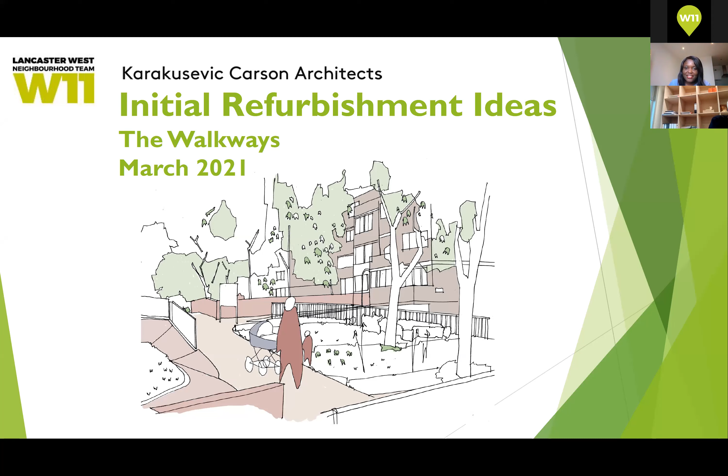Next slide, please. I'm going to start off with a quick introduction to the Lancaster West team working on the external refurbishment of your block - that's the outside of the buildings themselves, the communal spaces, the lower ground floor levels, and the landscaping.

Many of you will have met James Caspel, our neighbourhood director. Also here today is Andrew Sluizer, head of refurbishment design and delivery, Alfie Peacock, refurbishment design and delivery project officer, and Janet Hall, network engagement manager. So you'll probably hear from most of us before the end of the evening. I will now hand over to John Moore, who will introduce the KCA team.

John or Caroline? I was on mute, so I'm not on mute anymore. Thanks, Bunmi. It's been a real pleasure and privilege for myself and our team to get to know the Lanc West team over the past few months. Sadly, we haven't had a chance to get to know many of you residents because of COVID. You may have seen some of our faces down on site in September, October, November, where we've been looking at some of the empty flats and looking around the buildings, but it's not been possible to meet face to face. To save a bit of time, I'm just going to shout out the name of the team, and they're going to say hello so you can see their face light up on the screen.

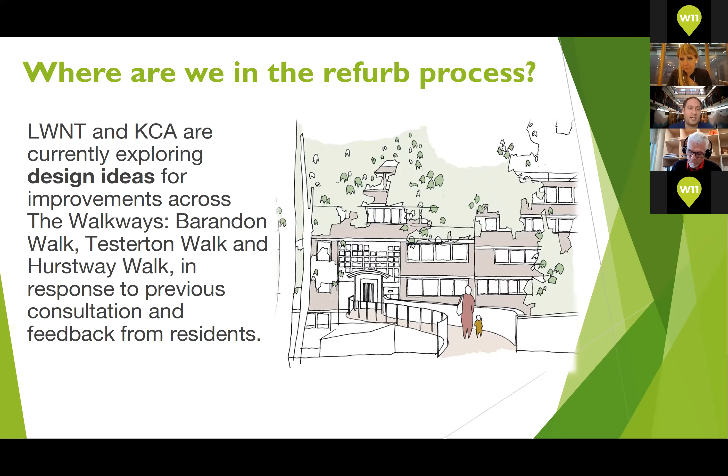So we move on to the next slide, please. So why are we meeting today? It's to develop the approach to the co-design process. We'll give some views about how we want to engage with you, but at the same time, given the government restrictions and so on, we have to be quite creative.

Really keen throughout, if people want to pop ideas and questions in the chat, they want to come on, you can put your hand up and Bunmi will bring you in. Although it's quite a long meeting and we've got quite a lot of information to share with you, we really do want this to be as much of a conversation as possible.

So we'll be sharing our initial design response to your top 10s, which were developed by residents in the last 18 months or so. Just to remind those of you this might be new to, we have an internal refurbishment program as well as the main block refurbishment program, and it's those main block refurbishments which we'll be talking about today—things like windows, heating, hot water and so on.

As we discuss those opportunities, I just want to emphasise we really do want to capture your ideas, concerns, immediate feedback. In the weeks following this meeting, Bunmi's mentioned we're going to share the video as well as the slide deck, and there'll be a summary version of the feasibility report which KCA have produced. For those of you who want that level of detail, it will all be made available to you.

So just a reminder of our vision: we are here to deliver a 21st century model estate for social housing, making the existing buildings more energy efficient, greener and safer. In January 2020, the council made a commitment that all homes on Lancaster West should also be carbon neutral by 2030.

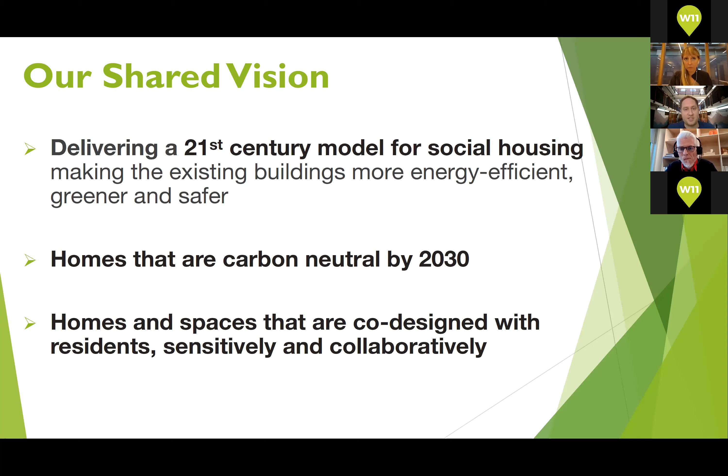So what we're really looking to do is seize this once in a generation opportunity to put a green recovery at the heart of the Grenfell recovery, which obviously the estate refurbishment falls under. We want homes and communal spaces to be co-designed with residents sensitively and collaboratively. For those involved before, we've discussed how that might work, but what we're trying to do is listen and iterate with residents, get your feedback, play that back to you, so we move together towards something the vast majority of residents see as a really good thing.

As I mentioned earlier, we have some additional funding news, and for the walkways that's particularly special because we've secured not just one additional pot of funding, but two. In terms of what that means, we're looking at over £18 million worth of additional new funding. Since we last met as a block, probably last summer, we've secured a significant amount of funding.

That's to do two things. First and foremost is to ensure the walkways are as safe as they can be from a fire safety point of view. A lot of works have been undertaken, and we're working with the London Fire Brigade to ensure that through the refurbishment process, we make your homes even safer. We've secured additional funding for things like sprinklers. We're going to hear later on about fireproof glazing that could potentially replace the fire curtains, which were brought in as an emergency measure and we've had nothing but complaints about. Equally, what you've told us is you don't like the look and feel that they give the walkways.

Secondly, alluding to the policy commitment to be carbon neutral by 2030, we've secured additional funding, in this case from central government. I can't say too much now, other than that it will enable us to really reach the gold standard of the refurbishment—things like triple glazing are now on the table, whereas when we last met that was, to be honest, an aspiration. It doesn't mean we can afford everything, so we can't necessarily afford to put 24 new lifts throughout the walkways, but it does mean we can ensure the investment we put into the walkways really does address a really positive refurbishment experience, and ultimately the outcome becomes walkways you're all proud to live at.

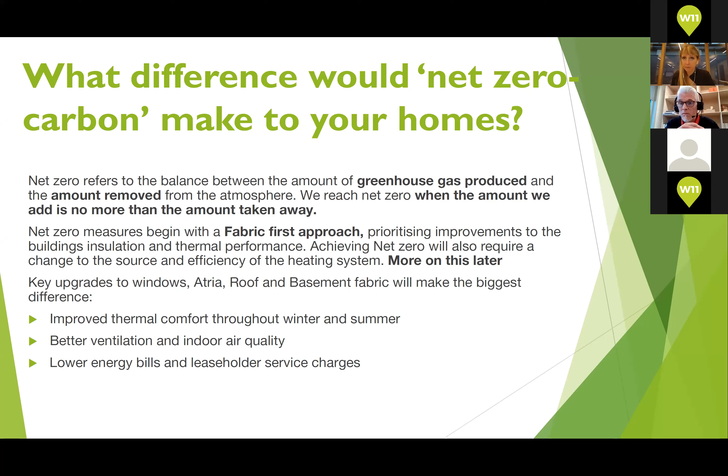The benefits for you will be improved thermal comfort, so it should be easier to keep it warm and cool, summer and winter. It should give you better air quality as well, and maybe more importantly for you, much lower energy bills. If you go to the next slide, please.

We've not only listened to the top 10 comments you've been making over the last few years, but also looked at ongoing resident feedback about things that don't work. It's clear that plumbing, leakages, electrical problems, and also problems with the door entry system are big issues. It clearly shows those systems are really getting to the end of their life and need to be replaced or significantly repaired. So we've kept that in mind, and the idea is that the new services or replacements will hopefully last for the next decades, 25, 30 or more years to come.

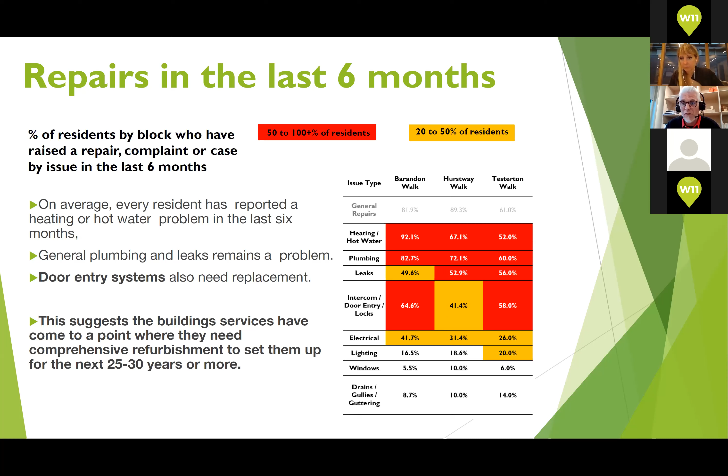Next slide, please. I don't know if any of you, I think some of the leaseholders are probably aware of this.

If you're buying or selling a property, the government requires an EPC, a performance certificate. Pretty much all buildings can have this certificate, which tells you whether it's really inefficient or really efficient in terms of energy. Most of the homes at Lanc West are category D, so not the worst, but not very good. Some are C, and our aspiration and target is to make these B or better.

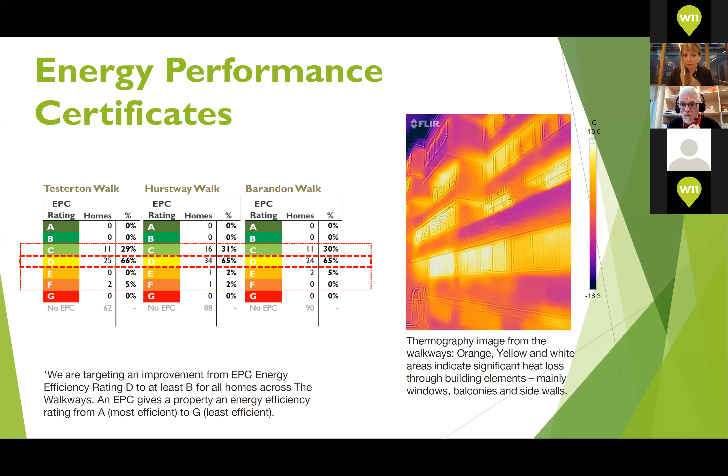We really want to make an improvement to the energy performance, the comfort and efficiency of your homes, and there are some clear areas where we can do that.

There are a lot of fire safety measures taking place, like replacement of front doors and introduction of sprinklers in the future. Those works can be quite intrusive and will require entry into your homes. If we can tie in the works that improve thermal performance with the works for fire safety, like sprinklers, then hopefully we can keep the construction time down to a minimum.

Bringing all this work together, we hope to improve the energy efficiency, improve the quality of the common spaces in the atria, and at the same time improve the fire safety. So if we go into the next slide, please.

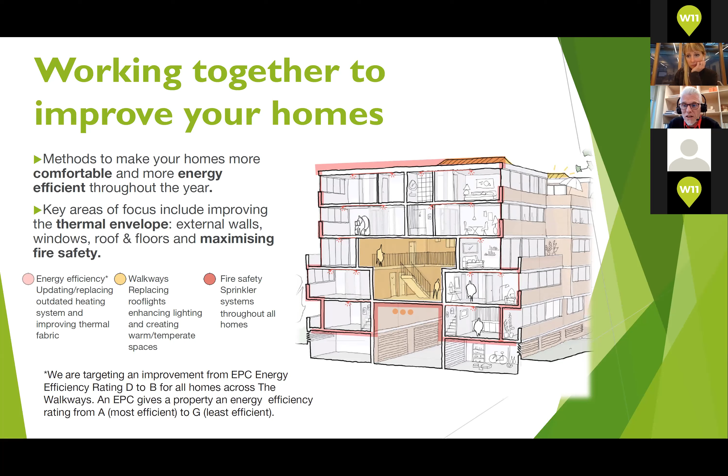Areas to be addressed are windows, heating and hot water, communal electric spaces, and how the communal areas look and feel, including door entry systems, refuse storage, and communal entrances. Within the homes, things like bathrooms and kitchens are an area where, in many cases, they've been there for 40 years, and it's been agreed that they can and should be replaced with your agreement. So that's something we can bring all of that work together.

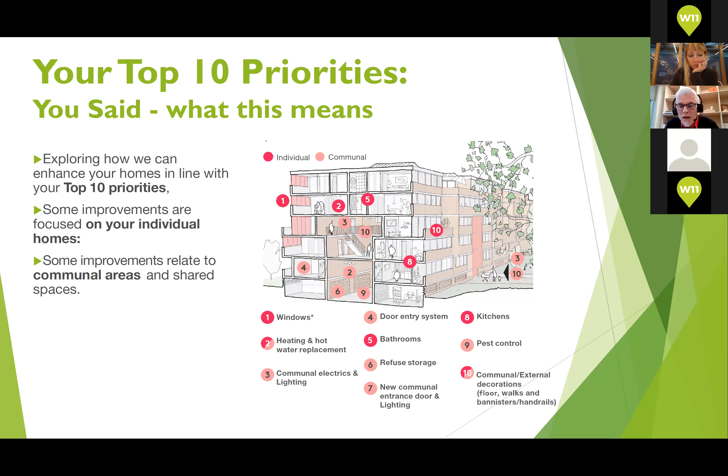If we go to the next slide, please. And the co-design process - well, if it hadn't been for COVID, we'd probably be meeting face to face many months ago. As I said earlier, that wasn't possible.

So we are starting now, really. I think we had a meeting with some block representatives slightly earlier in the year, but effectively in the next few months we should be talking like tonight with you more often about your individual homes and the things we can do in the common areas.

Tonight is more of a sort of information session - what we found out, what the proposals might be. As we go through the process, we'll be expecting feedback from you, which will help us make decisions about the right things to do. Hopefully, as we go on, there'll be detailed design areas where you can get very involved, like color of materials and choice of various other elements.

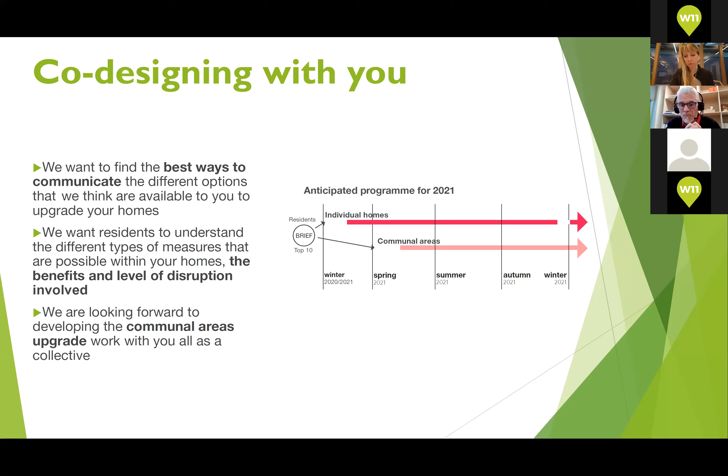Okay, so I'm going to hand over to one of our trusted team members, who has remotely been getting to know your buildings very well and is going to try and explain to you what we think they are.

You can see the three blocks: Hurstway, Testerton and Barandon. They're a really unique set of buildings - we think they're really beautiful. What's special about them is this long central communal area that runs through them, as you are all aware, and from which they get their name.

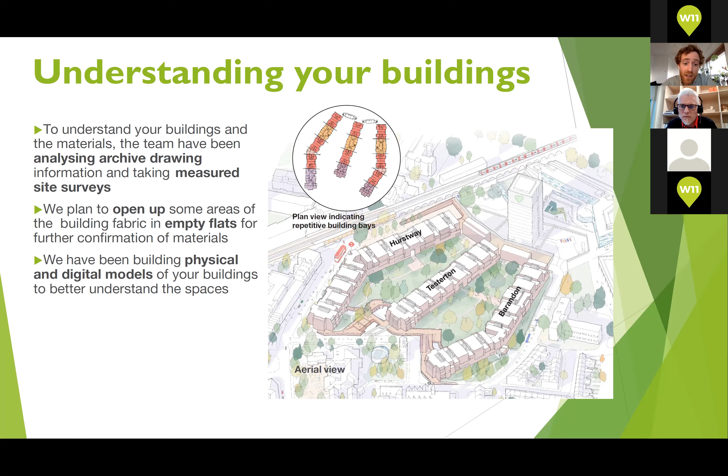You can see the lower levels of 3-bed homes. These are duplex homes or 2-story flats. There's a layer of flats above that, which is single story, and then on the top floor there's a mixture of flats and duplexes. These create the little light wells where the roof lights are that bring light down to that communal space below.

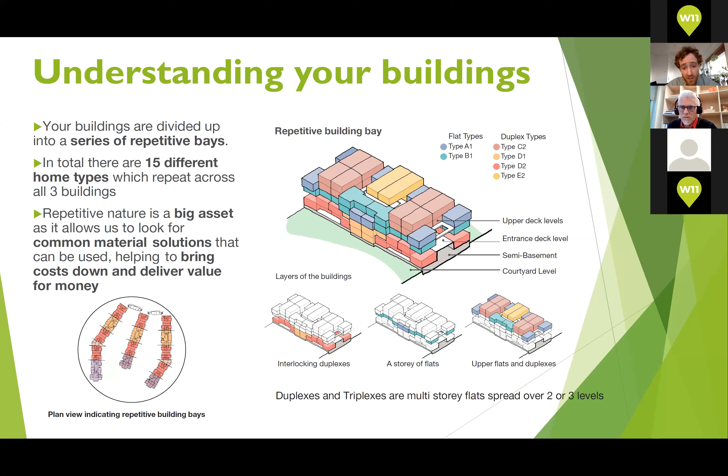So what does this all mean? It means we can use the highly repetitive design of the existing building to find a common solution. This brings down the cost of the upgrade work we're doing, and delivers value to you, the residents, and to Lancaster West.

Next slide please. These sketches show another aspect of the building we've looked at - your journey home from the street to your front door, and how this can be improved as part of the works. These sketches illustrate that experience of the journey, and what you're familiar with.

Common obstacles like the ramps at the courtyards, or the staircases inside that bring you to the upper stories, and the walkways which are quite narrow, and the steps at the threshold of each entrance. We want to discuss these because we think it's key to get the communal area upgrade right. Things like accessibility, making it easier for people with physical impairments to enter the building and get home, is a good thing. Also improving wayfinding, making it easier for you to get deliveries or for a friend to visit, including work like improving the signage.

Other things we're looking at and want to discuss are improving the acoustics, improving the doors and windows - the space is going to help with that. Another item would be looking at the lighting, so it's a much more pleasant and welcoming space on your way home. Next slide please.

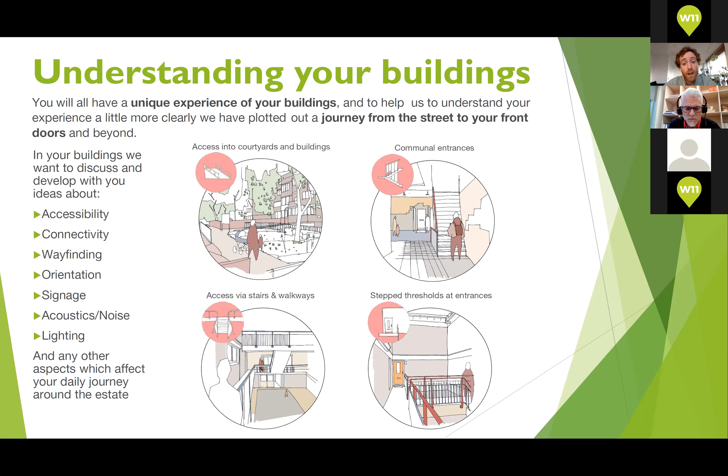Moving on to the upgrade works that John outlined and the principles of fire safety - this is a key part of the works. There's a number of measures currently being developed, with an expert team working on this with Lancaster West, which we are part of. Outlined here are some of the packages of this work.

The second is installing sprinklers in everyone's homes. Another is installing smoke detectors in everyone's homes and in the common areas as well. Another element is installing new windows - fireproof glazing for kitchens and bathrooms that open onto the common areas - and also replacing the entrance doors, which is already happening.

Lastly, to improve the thermal performance of the buildings, to keep heat in and reduce heat loss, we will be upgrading the fabric, and part of that will be using insulation. This insulation will be A1 or A2 rated, which is the highest classification for building materials.

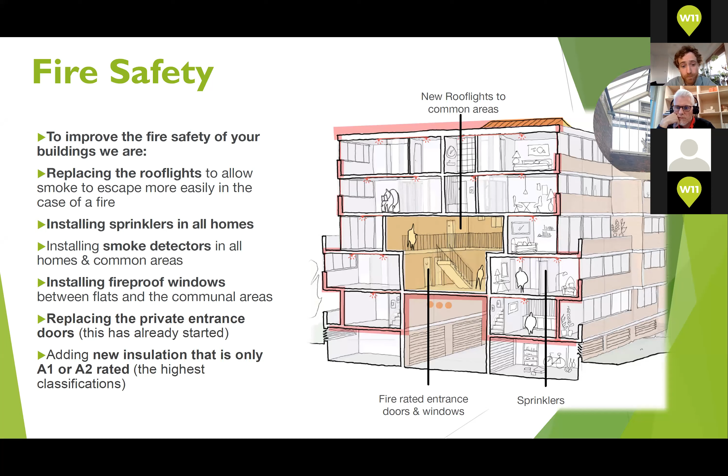On the next slide, you can see what these essential works mean for your individual home. On the diagram on the right you can see a typical 1-bedroom flat as an example. We'll have to install sprinklers in everyone's home, with each sprinkler head in each of the rooms. A new ceiling will go in to hide that new run of sprinklers, and this will require a couple of days' work by builders.

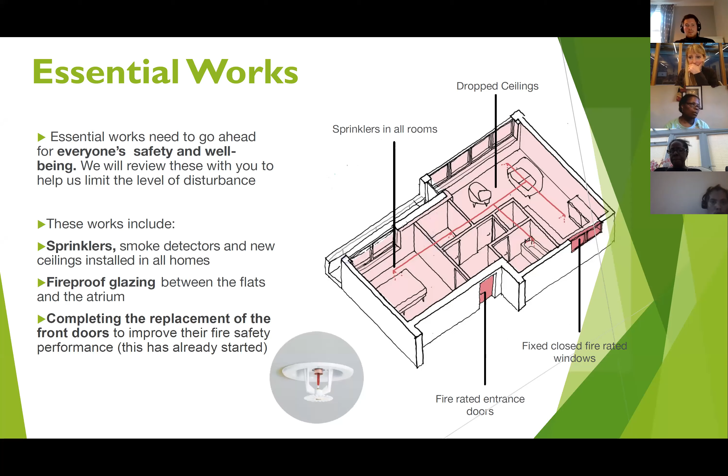Any windows that open onto the common areas, highlighted there in darker pink, will need to be replaced with fireproof glazing, and will also be fixed closed. Previously there was ventilation through that space, but that won't be allowed in the future. Similarly, the doors need to be replaced, which is again currently happening. Can you see the next slide, please?

Oh yeah, there it is. Oh, is that not coming up? Yeah, no, it came up. Sorry, it froze for me.

We're going to use this opportunity to install these ceilings and also install a new ventilation system. Up to 72% of homes have a window into the common areas, and as that window is going to be closed, we think it's an opportunity to bring a new ventilation system in that will help reduce condensation and mold coming from bathrooms and kitchens. This is called an MVHR system, which means mechanical ventilation with heat recovery.

What that simply does is bring fresh air in from the outside. It exhausts stale air to the outside, but recovers the heat from it, which means you pay less in fuel bills overall. The added benefit is it reduces condensation. All you'll notice is in the ceilings you'll have little vents, which you can see on the image at the bottom. Next slide please.

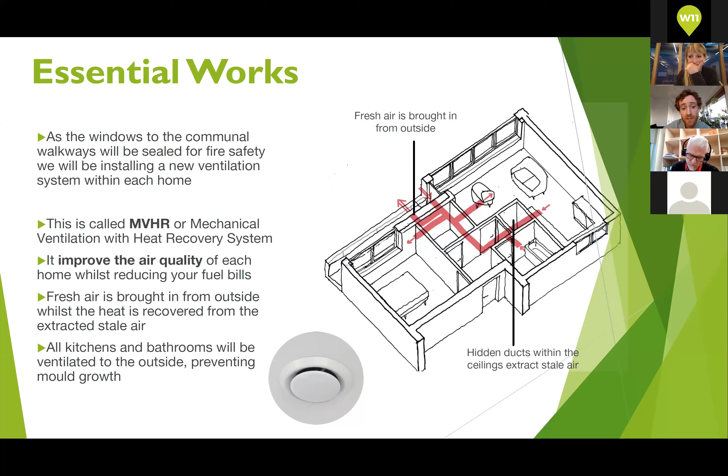Another part of these essential works is that... loaded? Oh, there we go.

Again, we've mentioned already new windows on the external faces of the buildings. They're going to be triple glazed windows and new balcony doors as part of that. There's going to be new low energy lighting in the ceilings in all homes. There's going to be new door entry systems, and upgrading of the electrics as well to make them up to standard. Lastly, there's going to be the removal of the gas supply as part of the fire safety improvements, and these will be replaced with new high power electric hobs.

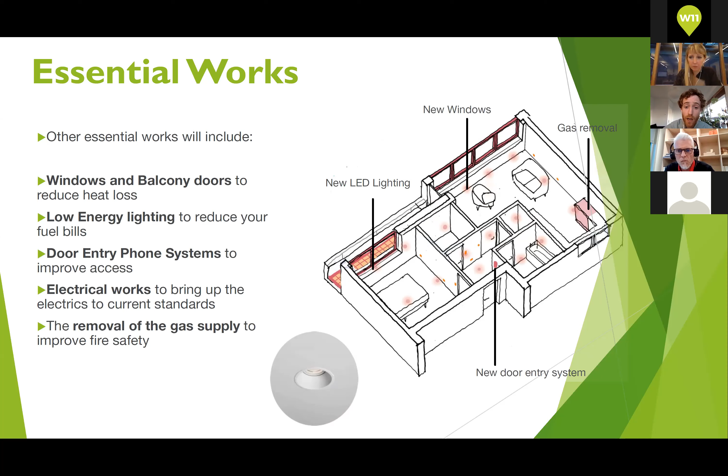On the next slide, going to talk about now the common areas and how we're going to treat them. These are the spaces that run through the center of the block. You can see it in the middle of the diagram on the right, and you can see the roof lights that bring light to those spaces below.

We are looking at ways that we can wrap the building in insulation, marked out in yellow, and in red you can see where we're going to heat the building. The homes are obviously going to be heated, and in this option on the right, we've looked at whether we could heat the central atrium space as well. This would be using low energy technology, like solar panels. The advantage is that we wouldn't have to insulate those communal area walls, any walls that face between the flats and that common area.

What it means is that the temperature in both spaces, the common area and the homes, would be roughly the same. From our analysis, this is suggested as the best way to treat this space because it reduces heat loss from your homes and minimizes disruption since we're not having to insulate those walls facing that space. However, we've looked at other options, and on the second option, on the next slide, you can see it's very similar.

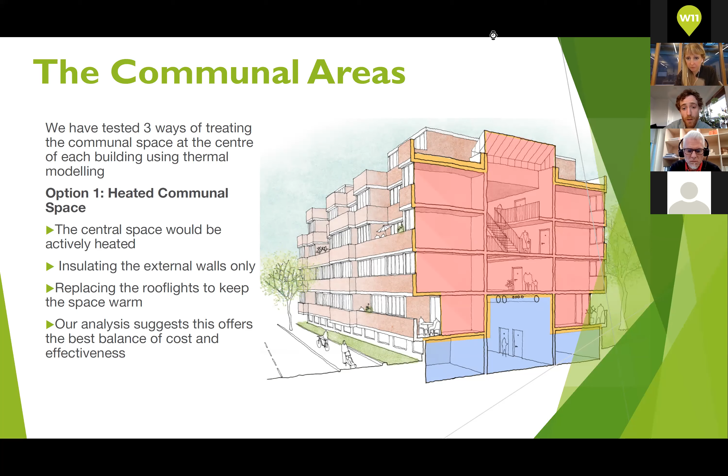It's got a new roof light like the first option. If you go back one slide please. And yeah, that's the one there.

It's quite similar to the first one. We're insulating on the external walls, insulating the basement as well. We're introducing some insulation in the common area walls, probably cavity fill insulation, which is a little less disruptive than a full lining. Similar to the first option, we're introducing a new roof light.

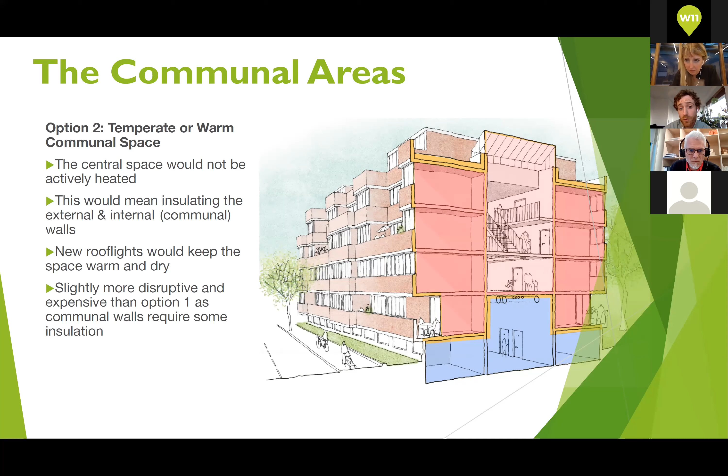The third option we've looked at is whether we would return to keeping the building like its original state as a cold space. That image coming up now. There we go, so the blue indicates the cold areas.

This requires a lot more insulation. We'd have to wrap those walls, and it means we have to extend the walkways, the access walkways, as a result. So there'll be a lot more disturbance involved in this piece of work. At the moment, option one is looking like the best option. Over to Caroline now.

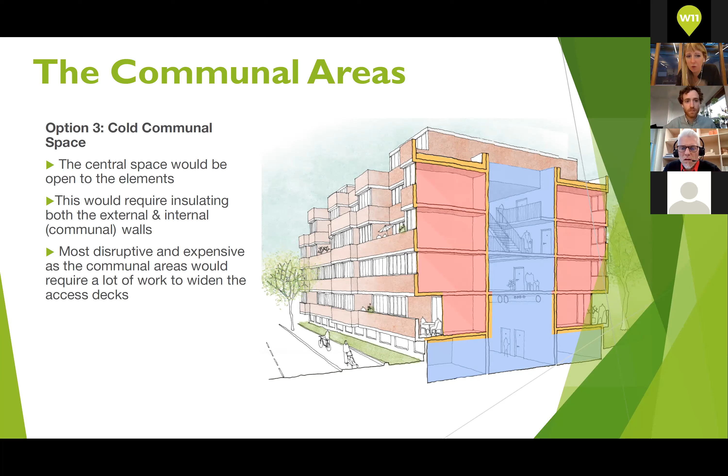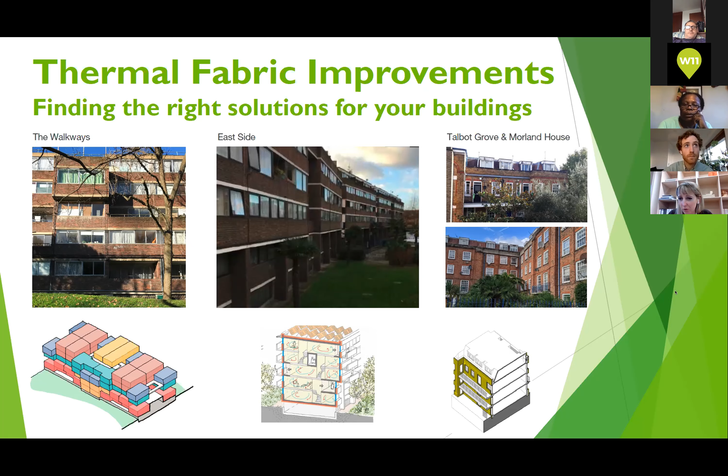So we were talking about finding the right solutions for your buildings, and about working quite closely with the other estate architects, but it's very important that we hone in on what is specific about your building. Your buildings have got very dynamic facades. The Walkways buildings have many projecting and recessed elements, resulting in a number of complex junctions for anything externally mounted to the facade. That's a key consideration for us, and this is not the situation with a number of the other buildings across the estate. So we're going to see different solutions coming forward for different buildings, no doubt, and it's important to acknowledge this from the outset.

So there are a variety of different elements in your buildings - the roofs, windows, walls, floors - which could be upgraded to improve their thermal performance. We've been collating a number of different options for how we might improve these particular packages, and it's really important that we develop all of these options with you into the future, acknowledging the careful balance between long-term benefits and short-term upheaval. We want to give you full clarity on each option to enable you to make a clear choice.

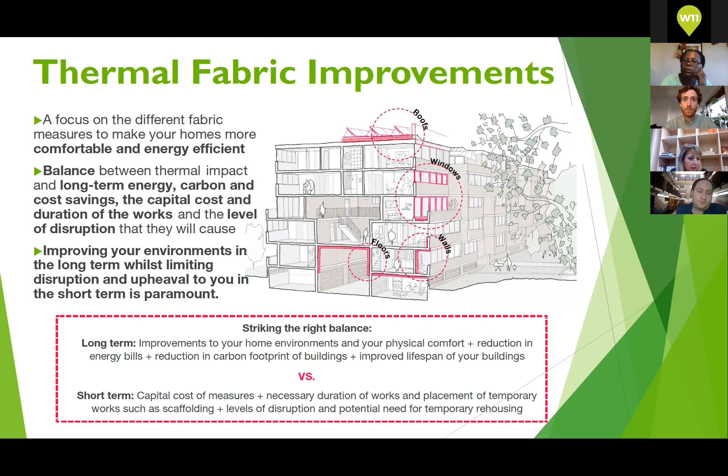So just to hone in on the specific packages themselves: roofs - insulating the roofs will reduce heat loss and heat gain, and there are other opportunities available when we look at the roofs. We'd like to look at ways of improving biodiversity and introducing green energy such as PV panels, which will help reduce your energy bills. With windows, they account for probably the largest thermal improvement, fabric improvement, in your buildings, because they account for such a large amount of the surface area.

So changing these to airtight triple glazed frames will have a huge impact. Similarly, upgrading balconies with new waterproofing, insulation and rainwater goods will help deal with a lot of the leakage problems that John mentioned earlier, which we're acutely aware you suffer with at this stage. Also with the floors - this is showing the underside of the slabs in the garage spaces and also the adjacent walls. Insulating the underside of those exposed slabs and walls to reduce heat transfer to the unheated garages below will be really important.

It's worth noting that all of the new insulation options currently being explored are A1, A2 rated, which is the lowest risk material rating under the fire regulations. We want to explain all of the different systems we're looking at with full clarity to you at every stage through this process, so you can feel comfortable that what we're proposing is the most safe solution. We're working with Mark Allen, who introduced himself at the beginning of this meeting.

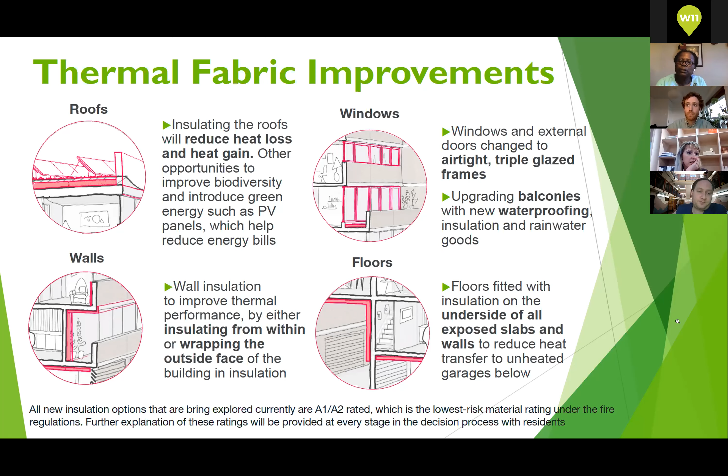Finally, Caroline, can you hear me now? Can you hear me clearly now? Good, I'm back on the call, so if you need me, just shout. Okay, carry on, thank you.

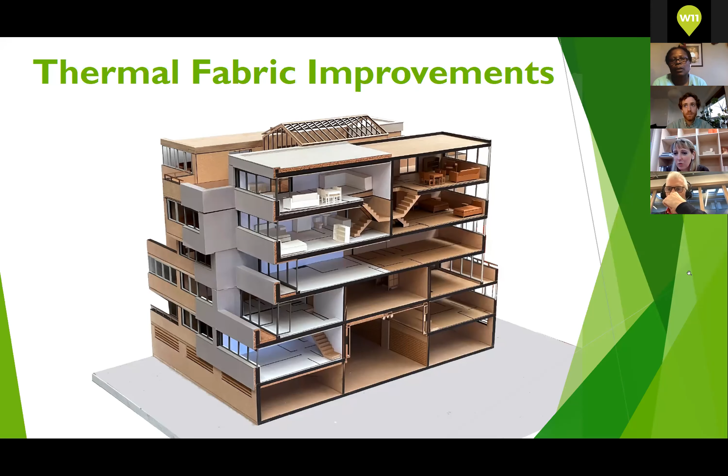It's also helpful to communicate how certain thermal improvements in your properties will help your neighbours and vice versa, and how they will improve acoustics. So it's a bit more of a bigger picture - there are knock-on effects for your direct neighbours.

So we just wanted to give a very brief introduction to the way in which we assess how well your building performs thermally, and with every proposed thermal enhancement that we're looking at.

John showed the thermography photo earlier in the presentation. Just to revisit that, that shows how heat escapes from your buildings at the moment. The white areas are where we're getting a lot of heat loss, and the darker areas are where it's actually better insulated, performing better.

All materials have a thermal value that contributes to the overall U value of a building element. Very broadly speaking, the better insulated a structure is, the lower the U value. So low good, high bad, meaning it will be better at keeping the building warmer in winter and cooler in summer. Looking at that thermography image, high U value, up at the white and the yellows, shows a lot of heat escaping. A low U value is where we have very little heat escaping, so it's performing much better.

Your current buildings' wall build-up has a brick outer face with a cavity and a blockwork inner face, which has a mortar coat on the inside. The U value this is achieving at the moment is 0.82, which is okay, not great, and there are things we can do to really help improve that. So what we're wanting to do is bring this down to around about 0.3 U value to meet with energy reduction targets that have been set.

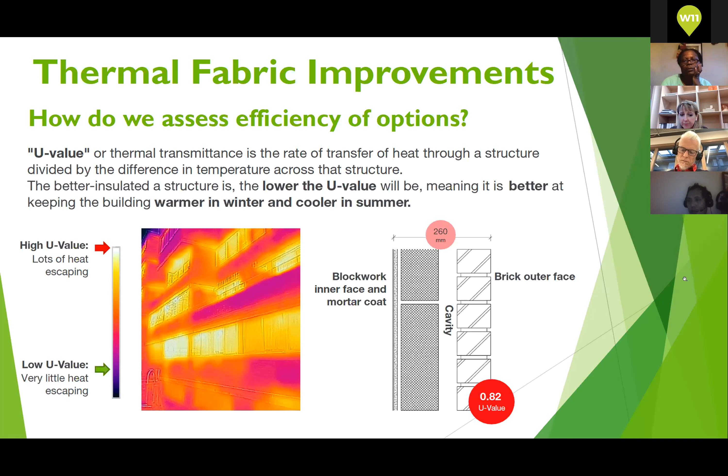So we've used an example of clothing to try and communicate to you the broad ideas about how we might go about insulating your buildings. Imagine that different ways of insulating your walls are similar to the different layers of clothing that we all wear. Suppose your buildings behave like a jumper, which is working relatively well at the moment, but you'd rather be a lot warmer. So one option would be to wear a thermal vest underneath your jumper, and another option would be to wear a coat over your jumper.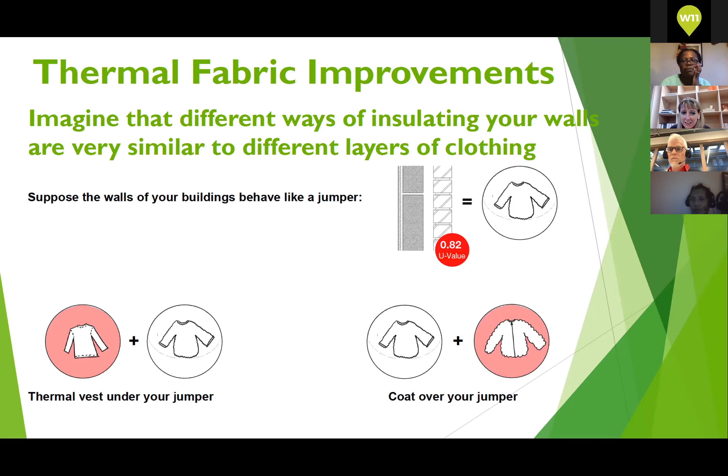So if we go down to the next slide - as you can see, for our buildings, we can put the thermal vest on the inside, or we can put the coat on the outside. Different insulations will behave in different ways at different locations within the building.

If we go to the next slide, it's worth mentioning that both of these measures are working really well. They are improving the overall performance of your buildings. However, at the moment, the internal wall insulation option is maybe just performing that little bit better. There are other considerations that we have to take into account here.

It's worth mentioning that it's maybe a little bit guided on the internal wall insulation side, because the actual insulation we've looked at there is really high performing insulation. Because of its location within the building, it's really adequately reflecting heat back into the space. The external wall insulation we're showing here is maybe not performing quite so well on paper, because it's supported on a system of rails, and as we all know, metal conducts heat really well.

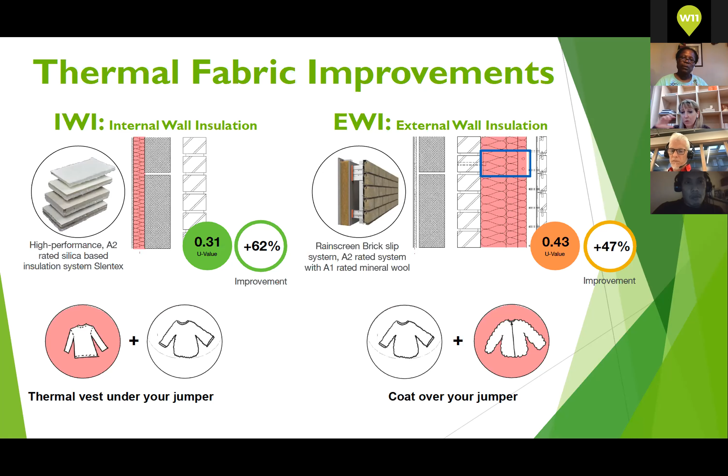So this is what's known as cold bridging. If you put a sort of metal grid on the outside of the building, these are the locations that heat can start to escape from your building and cold can start to come in. So we can look at other systems for those rails. At the moment, I think the metal system is predominantly the best, because it's meeting with all the fire safety regulations. We just need to make sure that everything we do is fully compliant with the A1, A2 ratings.

It's really important to note that these are just two options that we've been looking at. There's a myriad of different options out there, and we've been interrogating a number of different solutions. This is just a starting point in the conversation. We are not sitting here tonight saying we want to go with this one, we want to push this one ahead with you, but it is probably the two front runners, and it's also the two which have got quite a lot of difference in terms of their application and what it will mean for you in terms of installing them within your buildings.

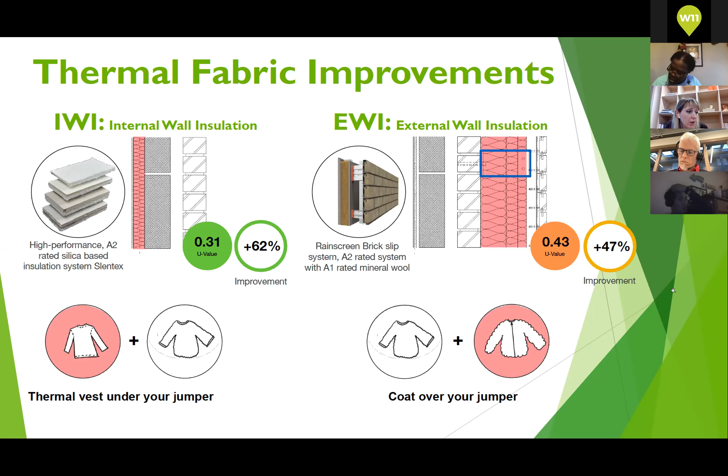So the other areas for consideration, it's not just about what it means for the long term, but going back to that short term analysis - what does it mean in terms of access into your units? For internal wall insulation, we have to gain access into your units to install it, although it is a relatively quick installation process. As we've mentioned previously, the essential works packages will need access to your units, so there is potential for installing some of these measures as part of that.

There is also a very small impact on the internal areas. It's only 3 centimetres that we're looking at extending that internal wall out to accommodate this insulation, so it is really highly performing.

The other thing to mention about external wall insulation is that we don't have to gain access into your units - there's a huge benefit to that. But at the same time, it is quite a lengthy installation process, and it does, we believe, require scaffold. It also has some implications for your balcony spaces - if we build out outside of the wall, we're building into those spaces, so there would be some loss of area on your balconies. We're trying to pitch out all the implications for these different materials at the moment, but we need to develop these in conversation with yourselves.

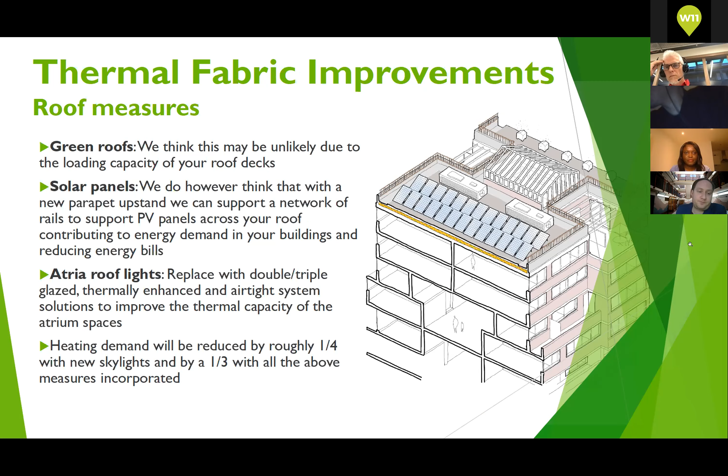I think what Caroline was explaining there - imagine if you're in your home looking at the window, very often there's a radiator on that wall, sometimes a kitchen. If there's a radiator there, we would be adding about 1 inch or 3 centimetres of material onto the wall in depth to improve its insulation. So if a radiator was hanging there, it would be taken off, we'd put insulation and plasterboard on, and then the radiator would be replaced.

In some cases there's a kitchen on the outside wall, and in those cases we may not bother doing that at all. It may not be necessary because the kitchen itself is already providing a little bit more insulation than a standard wall. So obviously, the more insulation we put on the better it performs.

But the calculations that us and our team, XCO2, have done have worked out that the biggest improvement will come from windows. The second biggest improvement will come from warming up the atria areas. The third biggest improvement overall will come from insulating underneath the building where the car park and garage is. The next area of improvement is the roof, and so on. So what's left is the small amounts of wall that remain - they will make a difference, but not quite as much as the others.

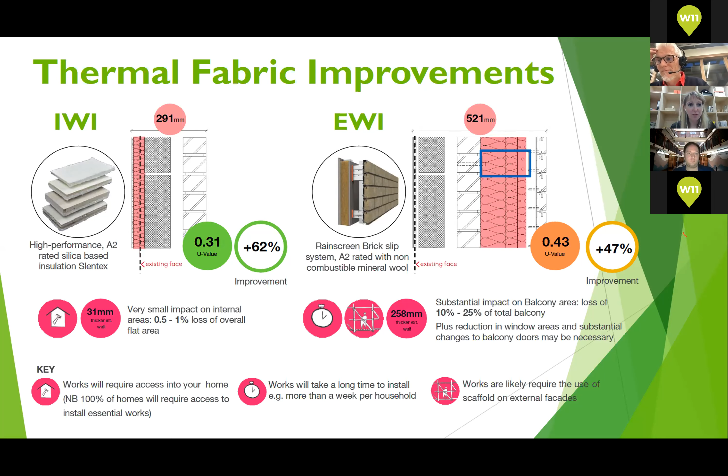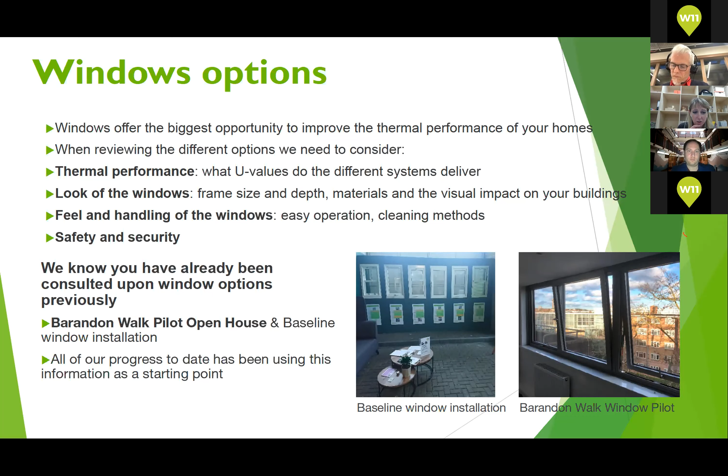Just to recap on the Windows pilot 2019, we weren't actually involved in this, but we've got a lot of feedback information from James and Bunmi and the team. We've plotted that out within the particular options we're looking at, taking good note of the color preferences you expressed, and the key areas: ease of cleaning, safety and security, and the thermal capacity of those.

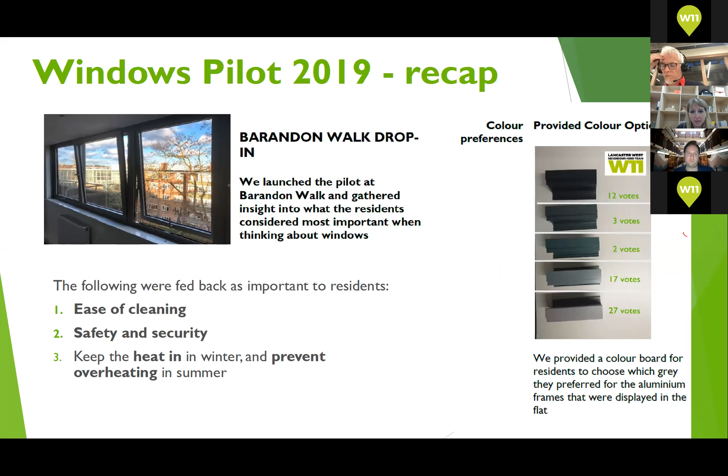The one thing to be said is that it can be quite cumbersome to operate, so we need to be cautious. The premise is that we're wanting to get a series of samples made up, actual size of your windows, maybe installed at the baseline entrance, so you can all come down and have a play around with each of the different systems.

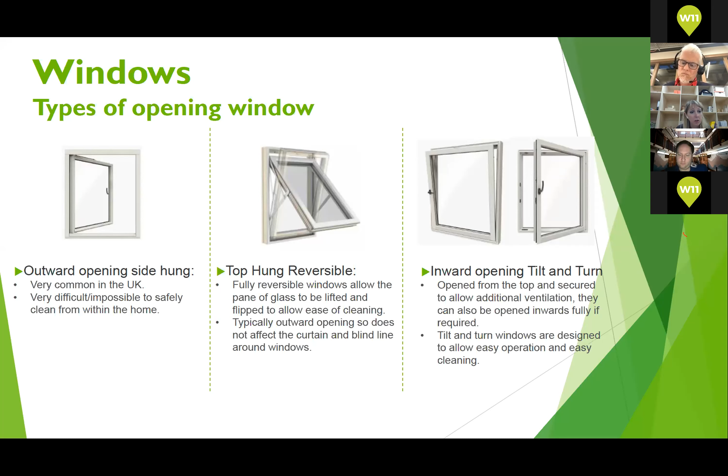You've obviously already done that within Barandon, but it's important we revisit conversations about the different window manufacturers. The inward opening tilt and turn, which you've got on Barandon, opens from the top and secured to allow additional ventilation - that's the image on the left. They could also be opened inwards fully if required, which enables easy cleaning. It does have the knock-on effect of interrupting your curtain or blind line, so that's another thing to consider.

Next slide, please. So these are the three different manufacturers we're looking at. Sorry, quick interrupt just on the previous slide.

Helena would like to know why sliding windows are not an option. I think we've had to discount it - we are not finding nearly the right types of thermal efficiency for sliding windows. We should plot that out as an alternative for future discussions, just so you've got it as a comparative exercise. We've been in touch with window manufacturers. One thing to mention is that the way your balcony doors work, we think we can only accommodate a slider there, because putting a side hung casement window in would have too much of a negative impact on your balcony spaces. So at the moment we're focusing on sliding doors for your balconies, but opening casements for your ribbon windows that sit at a higher level. Does that answer the question? Yes, it does, thanks Caroline.

Perfect. So these are the three manufacturers we're looking at: Reynaers, Velfac, and Ideal Combi, which is in Barandon. The Reynaers - it's coming down to a bit of a two-horse race at the moment, because the Reynaers is quite expensive.

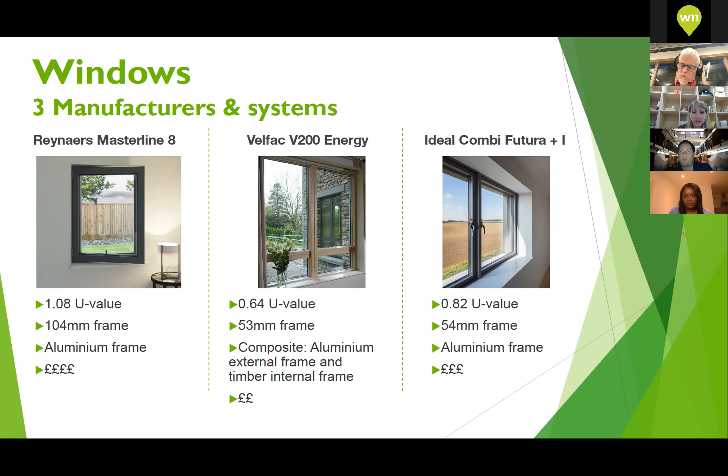And then the final one, the Ideal Combi - not quite as well performing as the Velfac thermally. It's got a similar frame profile, again full aluminium frame, and it's slightly dearer than the Velfac is coming in at the moment. Next slide, please.

Caroline, yes, new question from Michelle. Will the new windows cut the glare from the sun?

We are looking at dealing with the solar glare. Is it to do with heat gain, or is it to do with glare? Michelle, do you want to expand on your question?

Michelle: Hi, I live in Testerton, and my windows face Barandon, so I get the sun all day. It's very hot during the day in the summer, and the glare is quite strong.

We can look at dealing with this through glass specification, but I think, John, our recent discussions, especially about solar gain - which is when the sun comes through your windows and heats up the space from within - we are looking at whether there might need to be some solar shading adopted on the buildings.

Yeah, that's right. So Michelle, I think your flat and many others do get a lot of overheating, and it's because the windows are very generous in size and full width. So when the sun's shining on them, you are really going to overheat.

The new triple glazing, and the fact that we have to introduce a small ceiling void to hide the sprinkler pipes, will mean the windows get a little smaller in height, and being triple glazing, they reflect back some of the light so less daylight comes through. I think you'll still have very bright interiors from a daylight point of view, but as Caroline was saying, there's the possibility of introducing external shading devices.

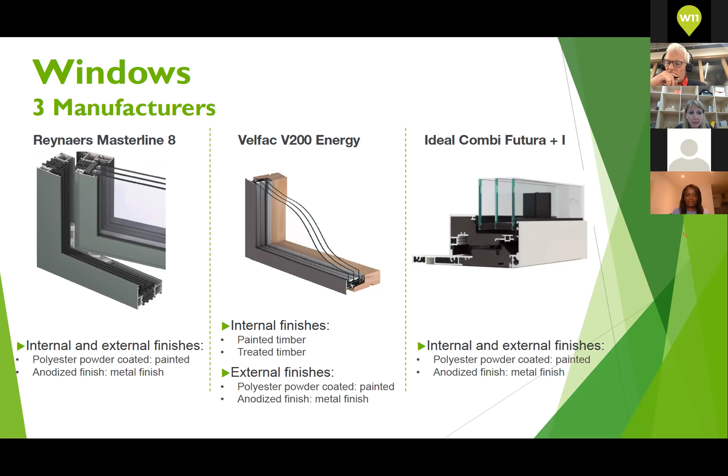So I think we've probably already heard quite a bit about the pilot, but this is an empty flat located on the lower levels at Testerton. It's number 411, a 3-bed duplex spread over 2 floors, and it has been identified as a possible location to trial a number of the systems and materials we have been looking at. The approach will be similar to the open house fit out of 317 Barandon, but will be a lot more comprehensive, with a focus on the thermal fabric improvements.

We want to run a series of informative videos where we can explain a bit more about the different systems we're looking at installing there. We want to run time-lapse videos. We think this would be really helpful, because you set a camera up in the corner of the room, you replace all the windows, and you clearly document how long it takes, how noisy it is, what's involved, how much noise, how much dust — all of that kind of stuff is incorporated within those time-lapse videos.

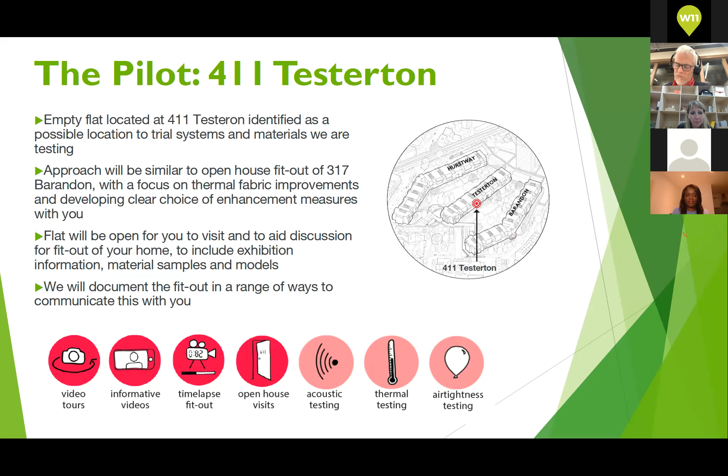So minimizing disruption, we have to have probably some quite tricky conversations in the future, no doubt. The team, us as a team, we want to limit disturbance to you whilst delivering these essential and optional works to improve the walkways. But health and safety is critical to assessment of these options whilst you are remaining in situ.

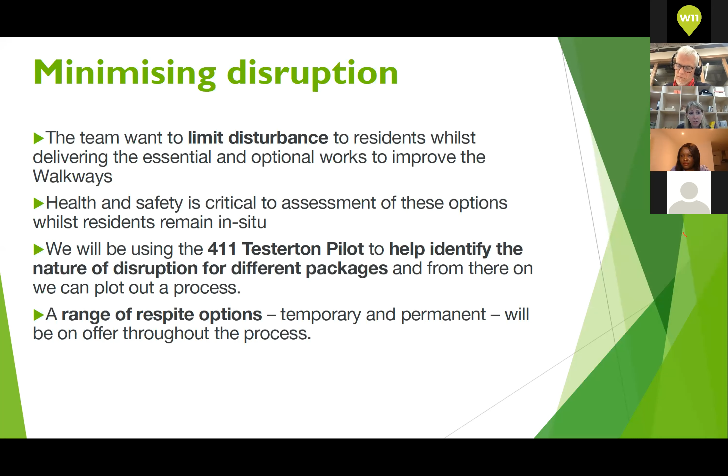So the 411 Testerton, we think the pilot will really help to identify the nature of disruption for all of the different packages that we're looking at. And from there on, we can start to plot out a process with you. I think it also enables that degree of choice.

You will be able to say, no, I just want the essential works, or in actual fact, you know what, if you want a new kitchen or the new internal wall insulation or whatever it is, you can more clearly understand what's involved in that process and how long it's going to take.

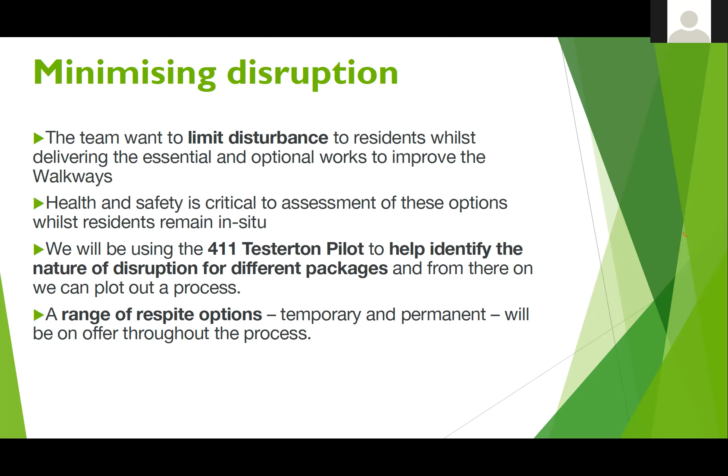So a range of respite options, temporary and permanent, will be on offer throughout the process. And that's something that I think the Lancaster team will be keeping you up to date as we progress these discussions. Next slide.

So there's the air permeability testing. That's all about understanding where the air is leaking from your unit, because that has a big impact on the thermal capacity of your buildings.

Temperature sensors located in the walkways. So we've been able to understand a bit more about how those function throughout the day. And that's going to be quite crucial in how we start to fit those particular spaces out, how we seek to improve them.

In situ U values. So going back to the U value conversations, these help to confirm our technical assessment of the thermal fabric. They are in effect real-time U values, so it's really helpful for us.

The thermographic testing on the external facades, and that's the infrared. That's the nice kind of pretty rainbow pictures that we have, which show where the heat is escaping from your buildings, and that helps us to identify the thermal weak spots in the building envelope.

Smart heat transfer coefficient tests. These are tests to evaluate how much energy it takes to heat your homes. So it's really helpful for us to be able to document that.

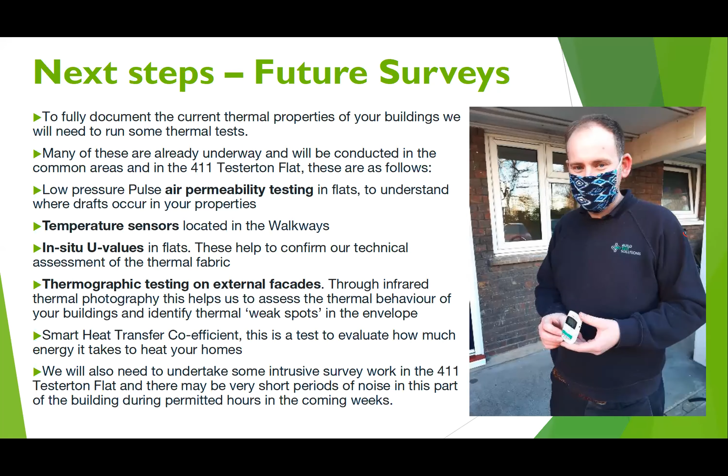I think it's probably not going to be until the end of March, beginning of April, that we start to look at opening up some of those areas.

So this is the call for volunteers. Build Test Solutions are monitoring the thermal and energy data across the whole estate, and they need to install small temperature and humidity sensors in occupied flats, so we get a clearer understanding of how your buildings are working. They're already installing these in Treadgold House, and there's a video on Instagram explaining the process. The installation should take between 5 to 10 minutes, and the sensors will need to be in your flat for approximately 3 weeks. This is one in question on the right-hand side. They're not big bits of kit - I think you'll barely even notice they're there. But it would be really super helpful to us to understand more about how your building's behaving.

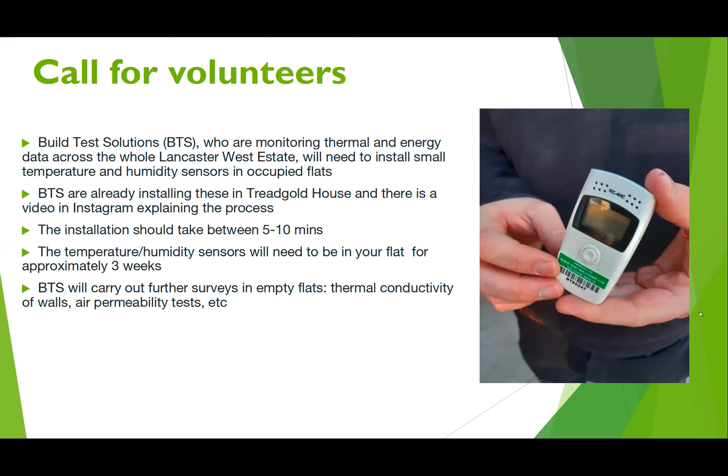Hi, thanks, Caroline. So my name's Janet. I am part of a small team that has been brought into the estate to look at the future heating and hot water solution. So we're looking at this at an estate-wide level, but to come up with a solution that is specific to each block and can hopefully make a positive impact in each flat as well.

Next slide. So just to give you a bit of the background about how the estate is currently heated. In the walkways, I'm sure you're aware that you're currently receiving heat and hot water from the temporary boiler located just outside Baseline. And there's a similar boiler located up in Camelford Court, which serves all the buildings in the green-yellow outline there. So this system currently heats 80% of homes, and there's basically large-scale plumbing.

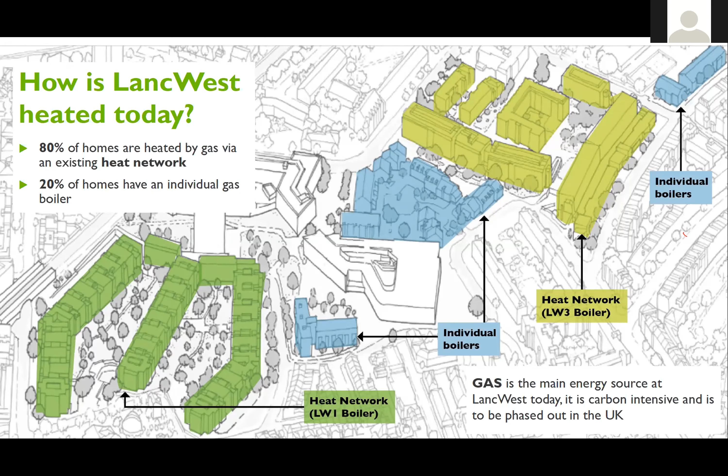Next slide. So at present, there's a large-scale kind of plumbing that connects each of those boilers to the heating, to the radiators in each of your homes. And that is currently powered by gas. What we're doing and looking at for the whole estate is how we could make that more efficient and perhaps bring those two heating networks together to form one large-scale heating network that will be built to purpose, that will be modern and hopefully give you heating controls that you don't currently have in place.

And the other important aspect of the project is to look to move away from gas, because there is a nationwide policy that we should be doing so. So we need to look at the renewable alternative for the estate. Next slide, please.

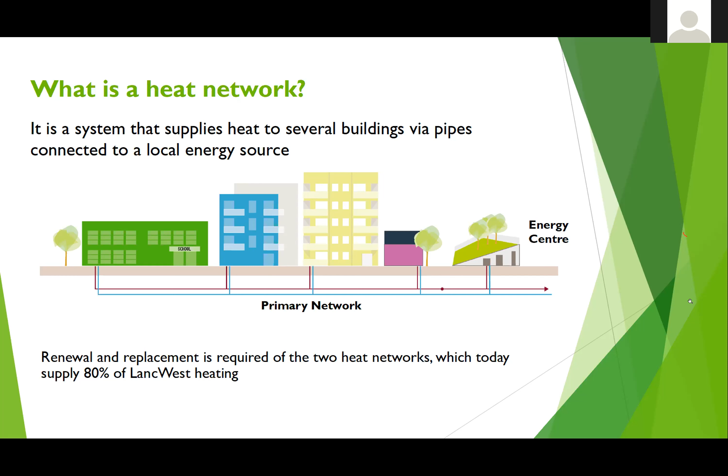So this is a bit of an overview of what's going to be happening. I've been going to every kind of architect and block meeting throughout the estate over the last few weeks to introduce this potential project. And we will then be doing a co-design series throughout the rest of the month and into early April as well. So hopefully I will see some of you at some events coming up.

In the background, what's happening is we have a technical team who is looking at the heating from an engineering perspective. So they're evaluating what kind of renewable options can really be used on the estate. You might have seen two guys just outside of the walkway - we're actually putting temperature sensors into sewers, as this may be a form of heating that we can actually use on this estate.

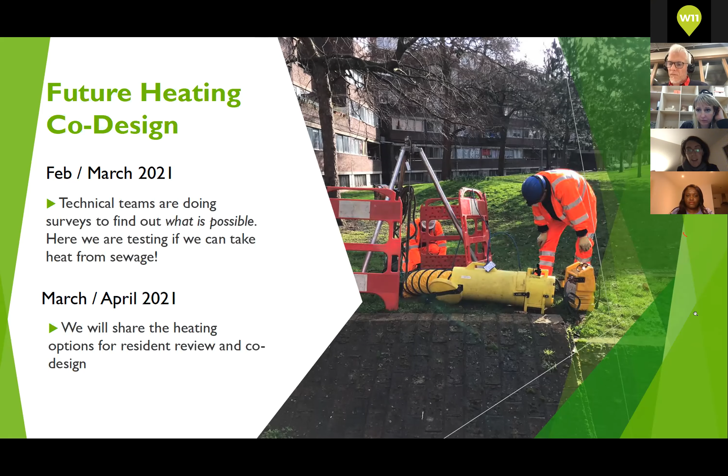Next slide. So hopefully lots of you have already sent me these. I've only got 10% responses from everyone in the estate, so I still need to see a lot more opinions, but we have shared a survey to everyone to look at what the heating and hot water situation is like currently. If you haven't got one of these, please email me or give the customer service desk a call and I'll get one sent out to you. But we recognise that lots of people have different heating needs, and we would like to see that we address these in the future solutions. So please get in touch.

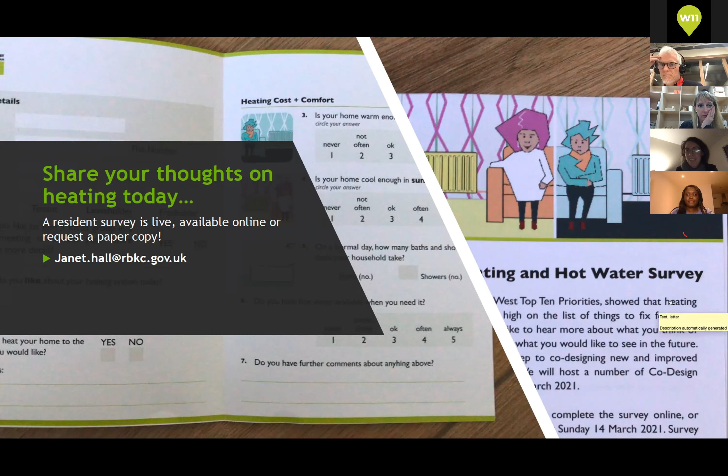Thanks, Janet. Yes, Caroline. So yeah, I mean it's really about continuing the conversation now, isn't it? We want to hear about your thoughts, your ideas, your concerns, as James mentioned at the beginning of the meeting, about the information that we presented this evening in relation to both your individual homes and your communal shared spaces. In particular, we want to hear more about your communal spaces, if possible. Are there any aspects of these unique spaces, because they are pretty unique, which you particularly like or dislike? And one thing, sorry, we glossed over it a wee bit earlier - when we talk about the atriums, we are talking about the communal corridors at the hearts of your building, which open up to the roof lights.

So they're a series of interconnected spaces, but when we talk about the atriums or the atria, that's what we're referring to. I hope that we can get that into common parlance, because a corridor is obviously quite different and behaves in quite a different way. So in terms of terminology, it's quite helpful for us to refer to them like that.

We'll also undertake a series of follow-up surveys, giving every household an opportunity to engage and feedback their ideas, preferences and concerns. I can't say it enough, we really want to hear from you guys about what you think about what we've been investigating. If you feel we're quite wide of the mark, we want to hear about it.